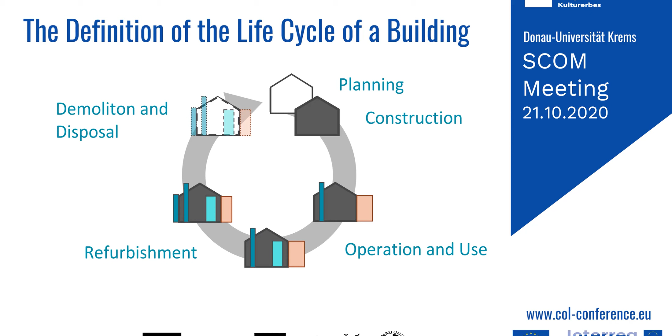And let us consider the economic life cycle. In the past, people were always wondering, when they built new buildings, they detected that the follow-up costs of new buildings are much higher than the follow-up costs of the buildings of the last generation.

And this trend started in the 60s of the last century, and more or less up to now, we have the problem that our buildings are too high in follow-up costs, not because of the energy consumption, which is only a minor part of the follow-up costs, but of the building technology. Building technology is a so-called cost driver. We detected this, and so we analyzed a lot of buildings concerning the economic life cycle.

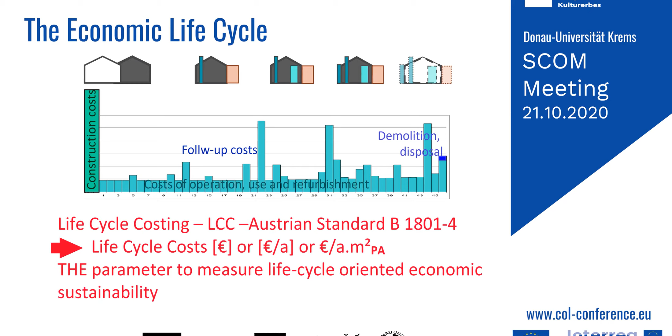We are very proud in Austria that it was possible to make our own standard, especially for the method of life cycle cost calculation. This standard is Austrian Standard B 1801-4. And the result is total life cycle costs in euro, or you can also consider what is important for benchmarking, parameters like euro per year, or euro per square meter prime area, the technical term for used area in the building.

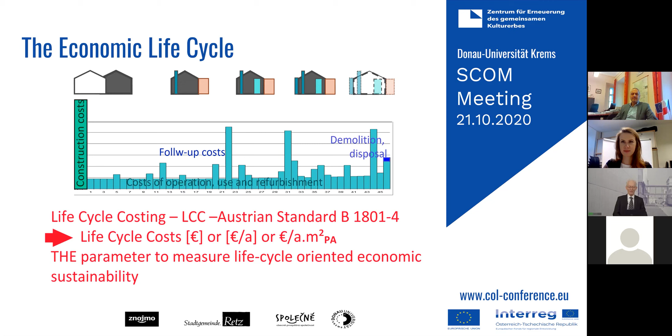And these parameters, these life cycle costs, are the parameter to measure life cycle oriented economic sustainability. And it's also to add that the total sum is not the interesting point. The interesting point is the matrix of all numbers we can calculate. That means we have so-called cost groups.

Here in this picture, you see the main cost groups according to Austrian Standard B 1801-2, in which the construction costs and the follow-up costs are standardized. Let us start with the construction costs.

That is the first row: 0 is ground costs, then number 1, ground development, number 2, construction structure costs, number 3, construction engineering costs, number 4, construction finishing costs, 5 is interior, 6 is outside facilities, 7, planning work. All planning work is also part of the construction costs, supplementary work, and reserves. And the follow-up costs are administration, technical operation of building, supply and disposal, cleaning and cultivation, very important.

Nobody knows, or just a few people know, that cleaning and cultivation is a main cost part in the follow-up costs of a building. Security services, facility services, overhaul, renovation and refurbishment. That's the main thing, the big maintenance things that we have to do, and other costs, and at last, removal and demolition. This is per definition the first level cost structure.

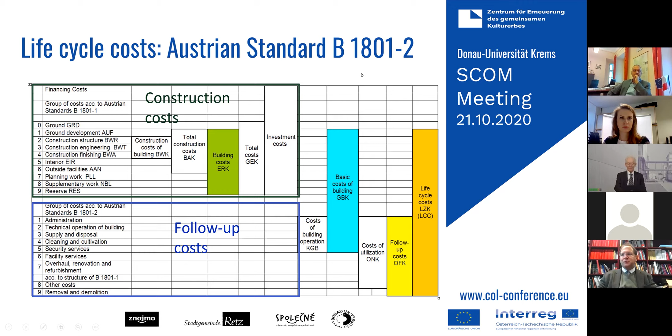Then we go to the next part. This is environmental life cycle. The environmental life cycle is much more complicated than the costs, because you have to consider the whole phase of the material flow over the life cycle of a building. And this starts much earlier than life cycle costs, namely before the planning phase. There is a phase, production of building materials and components. And this has to be included. So every new production of concrete has to be considered.

Then you have the planning and construction phase, the completion. It's more or less the same as in the life cycle cost. The operation and use phase. In this phase, in terms of environmental impact, of course, the energy consumption is the main part which causes environmental impact. Then you have demolition and disposal in the standard consideration, and then you have recycling and recovery.

For our analysis, we do not consider everything, because it's very complicated. Things will be considered according to the standards ISO 14040 and ISO 14044, which give the basis to calculate the GWP, the global warming potential, with the unit kilogram CO2 equivalent, and the PENRT, which is the non-renewable energy consumption during the whole phase of the life cycle, with the unit megajoule. These parameters measure the life cycle-oriented environmental sustainability.

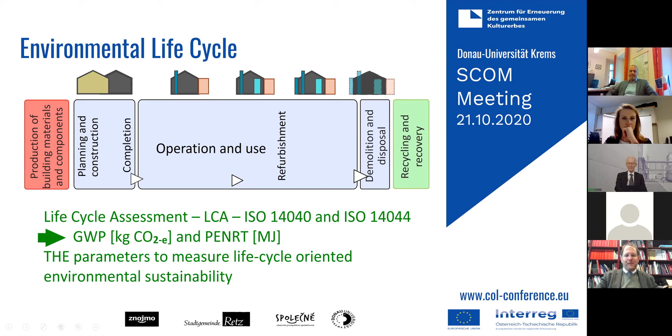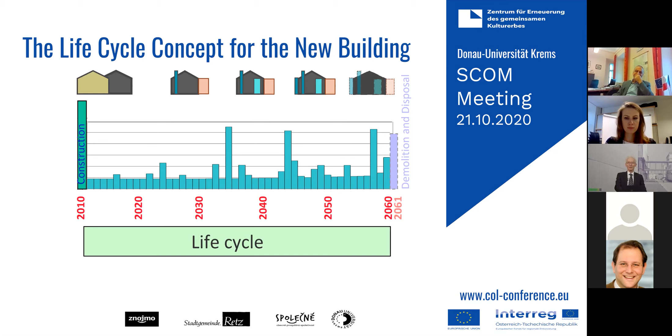So now I will show you the results. Very interesting. You can see on the left-hand side the total amount of global warming potential in the unit of kilogram CO2 equivalent. And you can see it for the whole building over the whole 50 years, or let's say 51 years, because the refurbishment in 2010 is also included. And on the right-hand side, you have the same amount for the new building.

You can see that the new building has at least 20 to 25% more consumption of CO2 equivalent than the old building. Why is this so? Consider the two parts of the columns. On the left-hand side, the building construction part, that's the second one from the bottom. This building construction is less than 200,000 kilograms CO2, so about 180,000 kilograms, 180 tons, is used for refurbishing, for putting in new bricks, putting in new concrete.

And on the right-hand side, the whole construction of the building has to be done, which means you have about 450 tons of CO2. So this is the main part of the total CO2 consumption over a life cycle of 50 or 51 years of a building. If you compare the heating, we have on the left-hand side the old building. Of course, there is no outside insulation. By the way, they have absolutely the same heating systems in the old and the new building. You have about 180 tons of heating CO2 produced over 50 years.

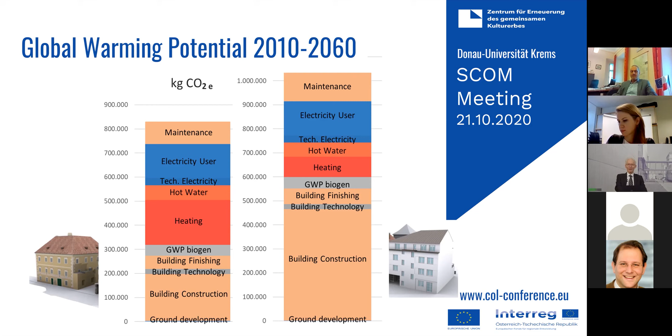I would add to this that this is, of course, a prediction. So we don't know how the heating will be, let's say, in the year 2030, 2040, 2050. If it comes from totally renewable sources, then it makes a smaller difference, because heating in terms of CO2 does mean that the old building has a bigger advantage compared to the new building.

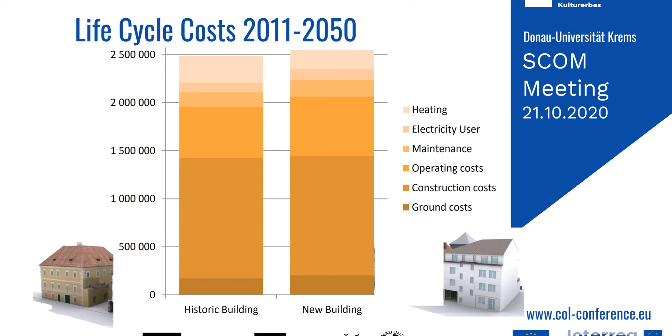And in costs, it will not change very much, because this is a question of the market. So these are my results of the presentation, and I hope I have given you a deep insight: what does it mean to consider economic and environmental life cycle consideration of a building? Thank you very much, ladies and gentlemen. I'm now open for questions.

Thank you very much, Dr. Floegl. Does somebody have questions to the topic or to the lecture? I may. I also would like to thank you, Helmut, for the interesting lecture. I knew about this project before, but what I would like to remark on is one thing, as you had the buildings standing.

Excuse me, I must interrupt. I do not hear. My sound is very low, so I can't hear it. Ich höre fast nichts. One second, it will be fixed. It will be fixed.